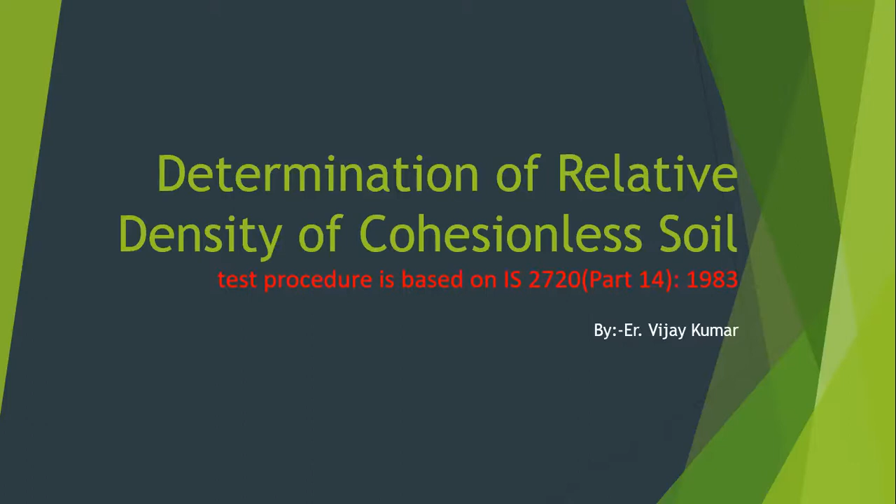Today we are going to do the determination of relative density of cohesionless soil as per Indian Standard Code 2720 Part 14, 1983. So what do we mean by relative density?

Relative density is defined as the ratio of the difference of void ratios of cohesionless soil in its loose state and natural state, which is Emax minus E. Emax is the value of void ratio when it is in loose state, and E is the natural void ratio, when soil is in natural state.

To the difference between the void ratio in its loose state and the denser state. Emax again means the void ratio when the soil is in looser state, E minimum when the soil is in denser state. Relative density determines the compactness of the cohesionless soil, and cohesionless soils are gravels and sand. It's represented by ID, which is equal to Emax minus E.

Emax is the void ratio when soil is in looser state, minus E, the void ratio when soil is in natural state, divided by Emax minus E minimum. Emax again the void ratio when soil is in looser state, minus the void ratio when soil is in denser state.

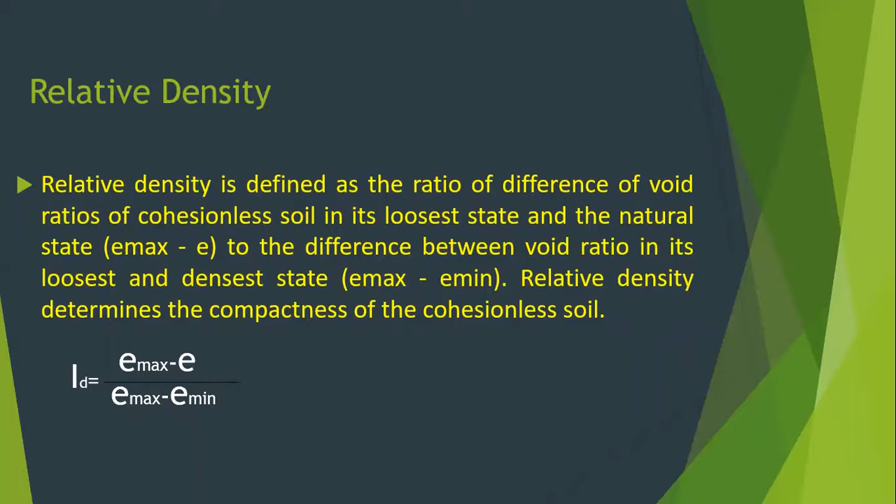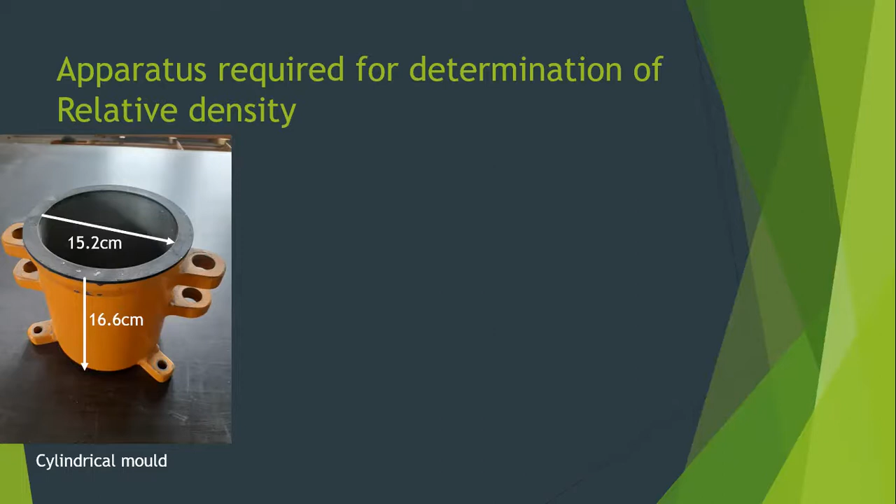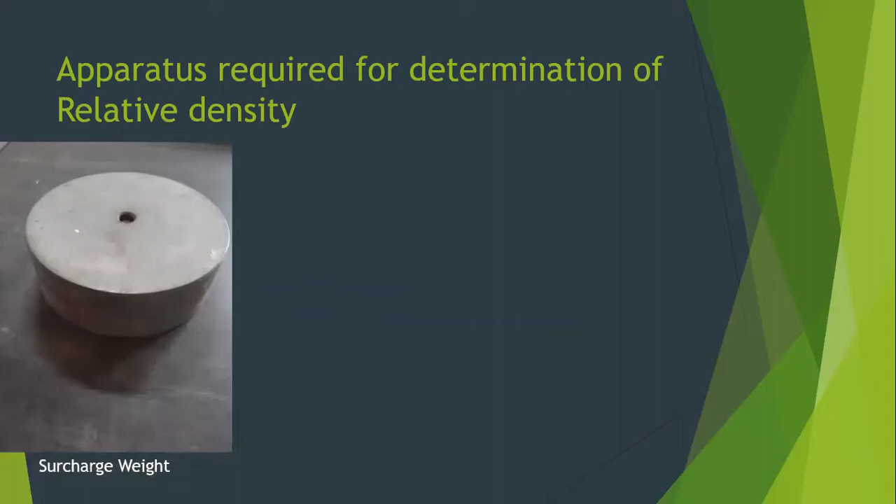So there are some apparatus required to perform this experiment. These are cylindrical mold, its internal diameter is 15.2 centimeter and its height or depth is 16.6 centimeter. Also required: dial gauge with the stand, circular plate, surcharge weight, soil sample or cohesionless sandy soil, and vibrating table.

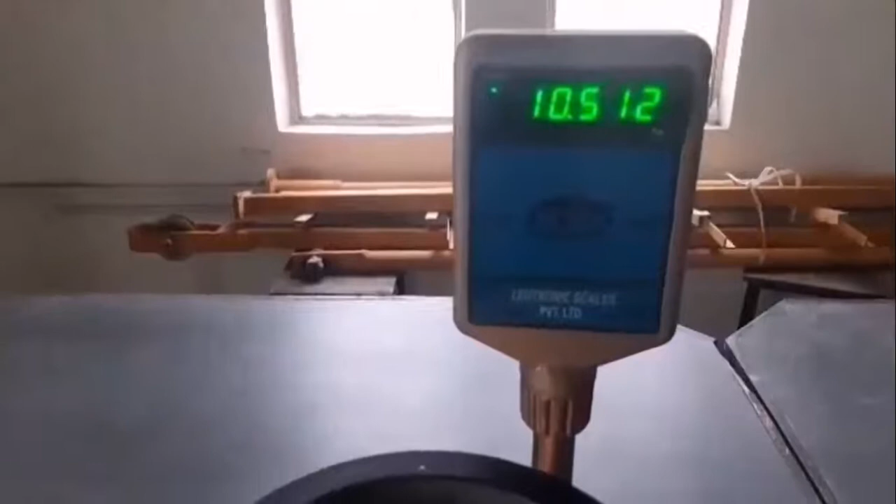Let's see how to perform this experiment. First of all, you have to empty weight the cylinder and note it into your observation sheet, which comes out to be 10,512 gram, recorded as W1, the empty weight of mold or cylinder.

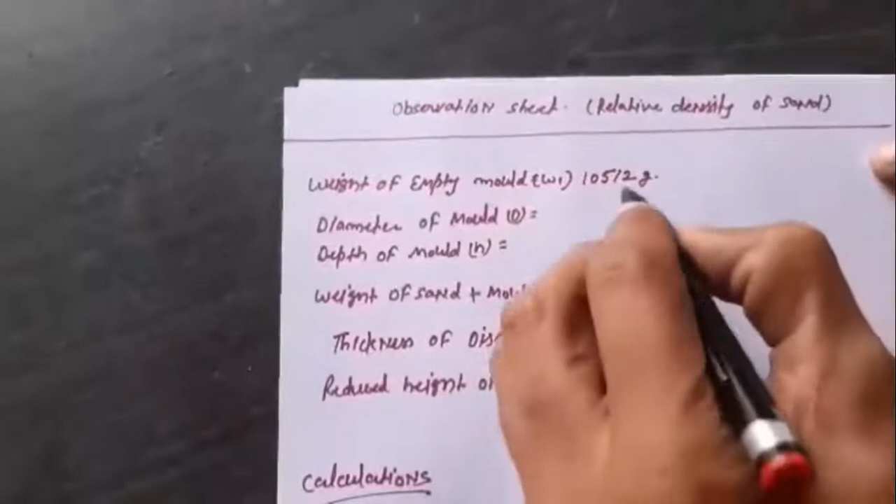Now measure the diameter and the depth. Specifically you should use a vernier scale, but for simplification here I am using the normal scale. Measure the depth and the diameter of the mold and note it down into the observation sheet: diameter comes out to be 15.2 centimeter and depth is 16.6 centimeter.

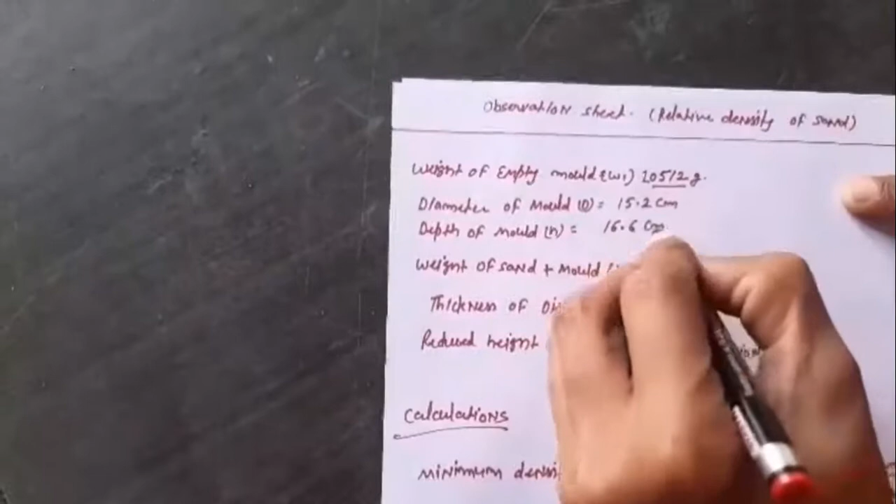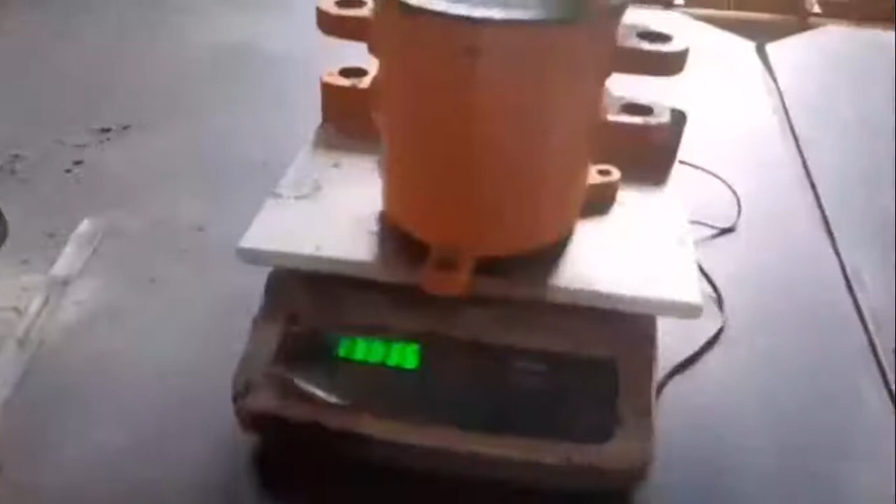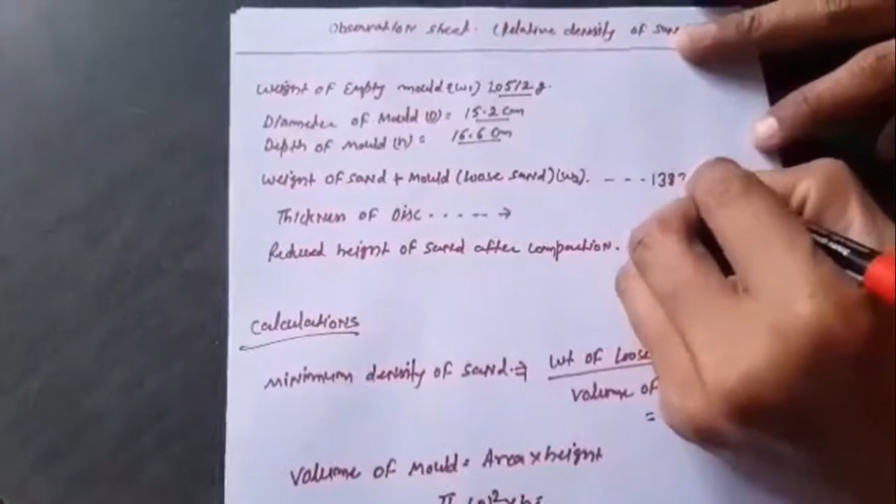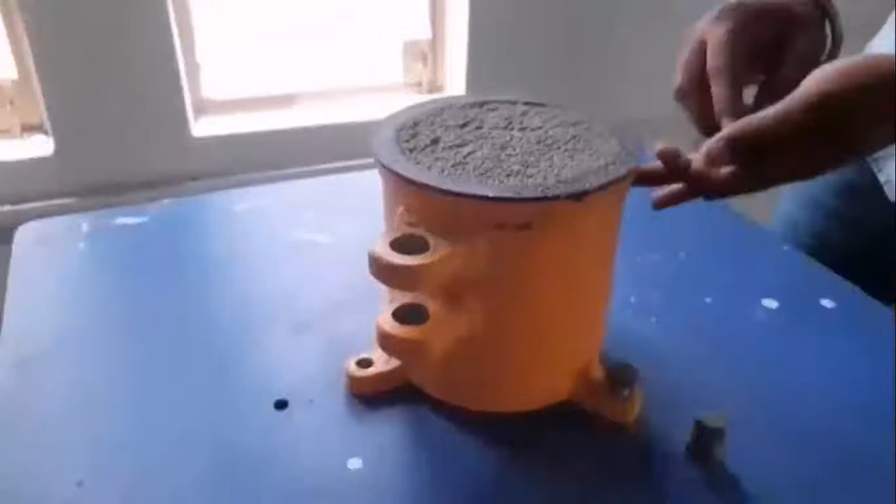Now bring that mold and place it over the vibrating table and tighten the mold using the screws. Make sure it should be tight enough, so that while vibrating it should not move.

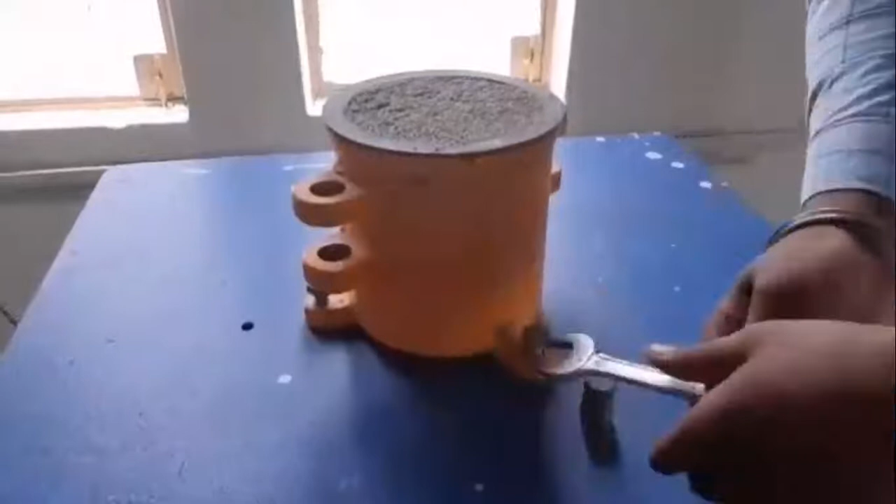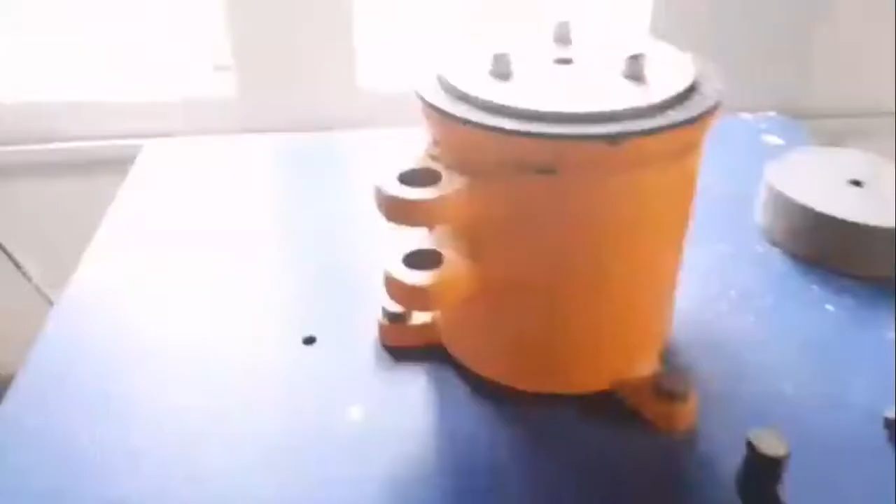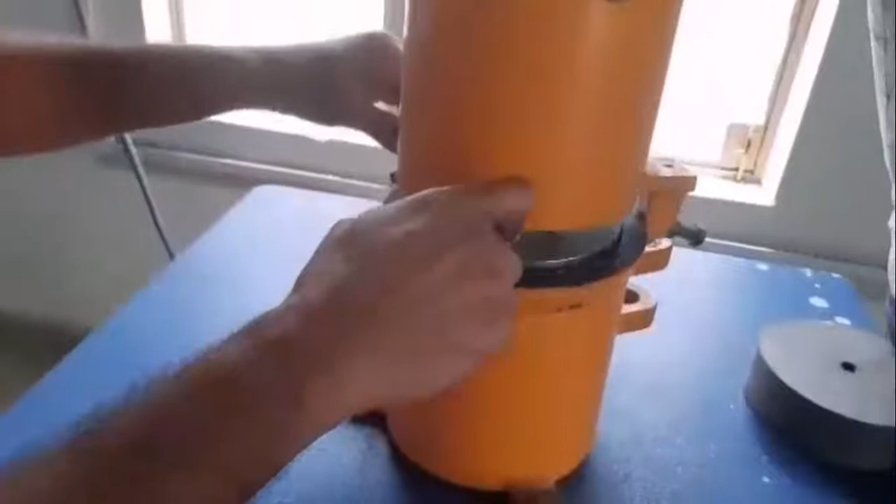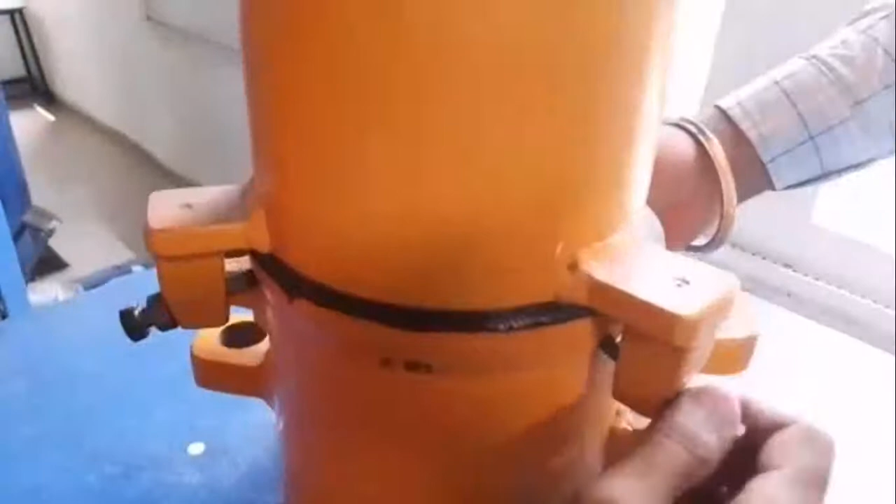Now place the plate over the sample, bring the collar and place it over the cylindrical sample in which we put the soil, placed centrically, and tighten its screws using the tightening screw. Check all the screws should be tight enough.

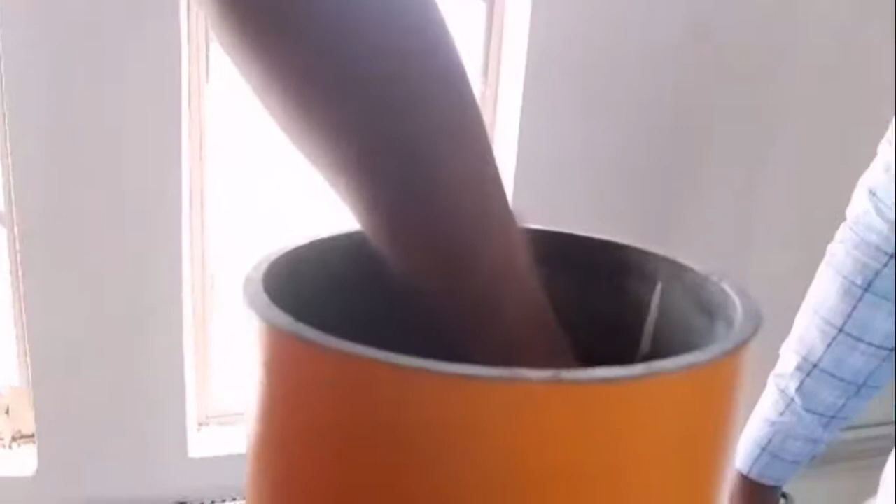Now place the surcharge weight over the plate through the collar. Turn on the vibrating machine, continue vibrating for 8 to 10 minutes, and stop vibrating after that. Take out the surcharge weight and remove the collar by loosening the screw.

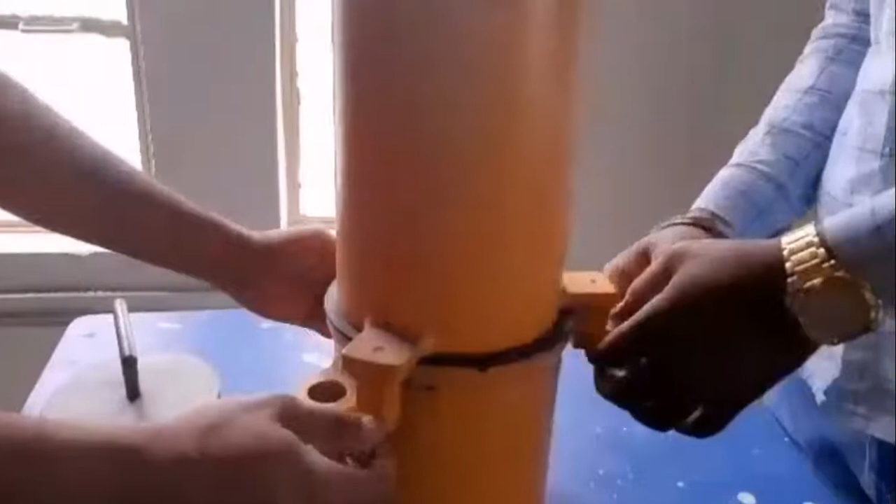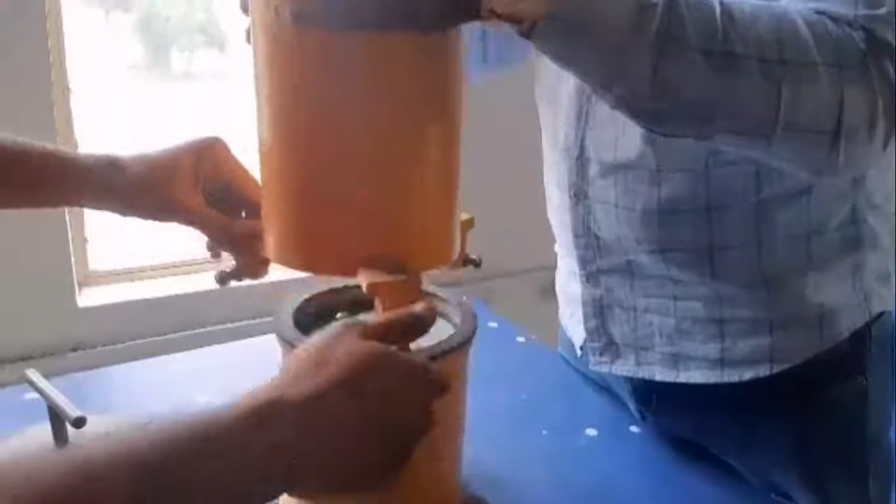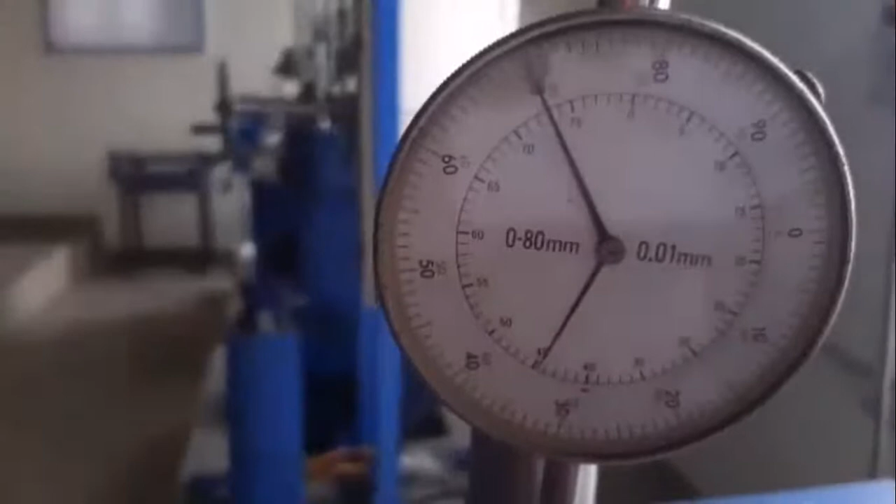As you can see, soil compaction has already taken place due to the vibration. This is the dial gauge that we inserted; initially record the reading, or you can make it zero, which reading is approximately equal to 44.70 mm, with the smaller needle and the larger needle placed like this.

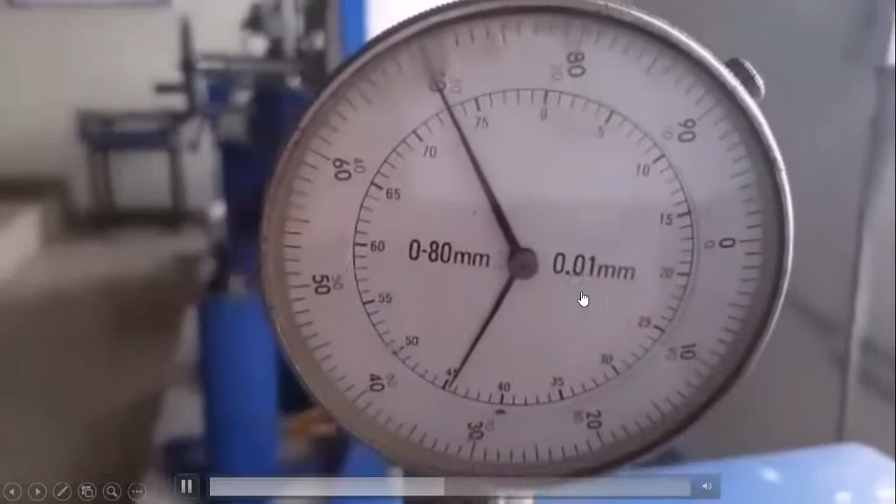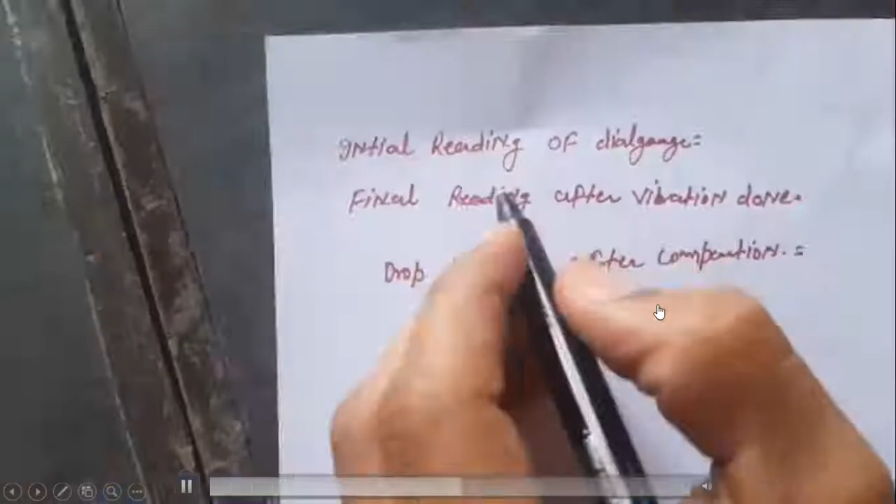So larger needle complete one circle means it's equal to 1 mm. Its least count is 0.01 mm, and smaller needle gives one revolution equal to one digit movement. Now drop the needle to the bottom over the plate and record the reading again, which is approximately equal to 22.91.

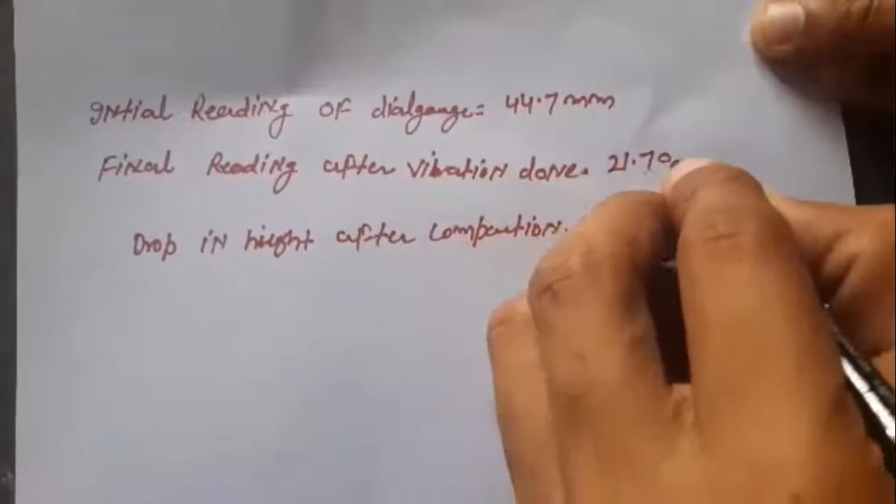Initial reading over the top of the mold. After vibration, that reading is noted, which is 21.79 mm, and drop height after compaction, which is the difference of initial and final reading, comes out to be 22.91 mm.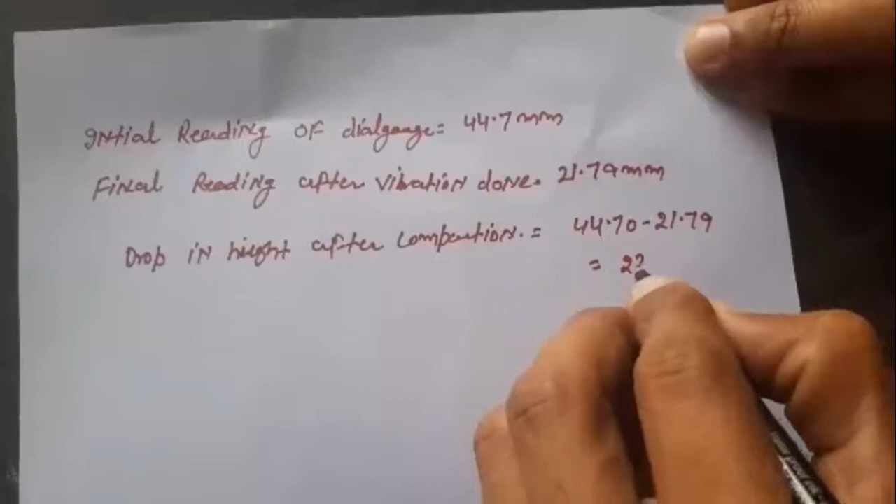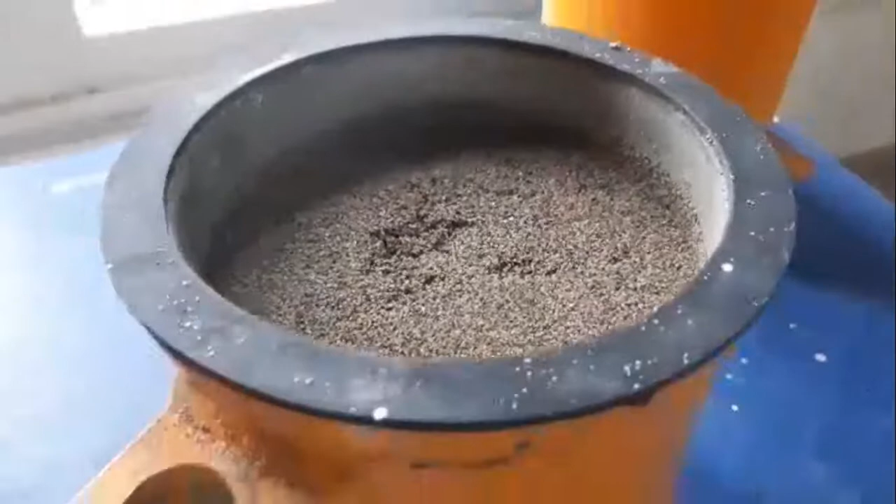Now take out the plate also, which is also included into thickness, and measure its thickness, so that we also add it, because it's also affecting the drop height basically. So measure its thickness and note it down into the observation sheet, which is the thickness of plate.

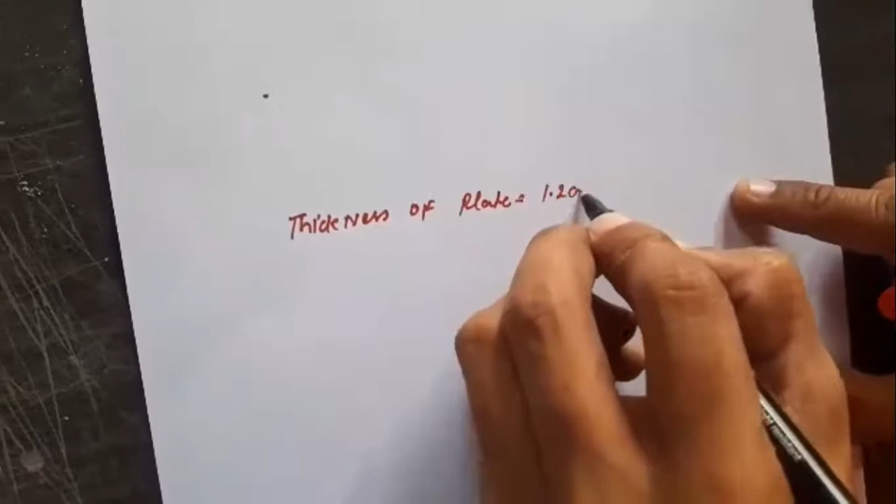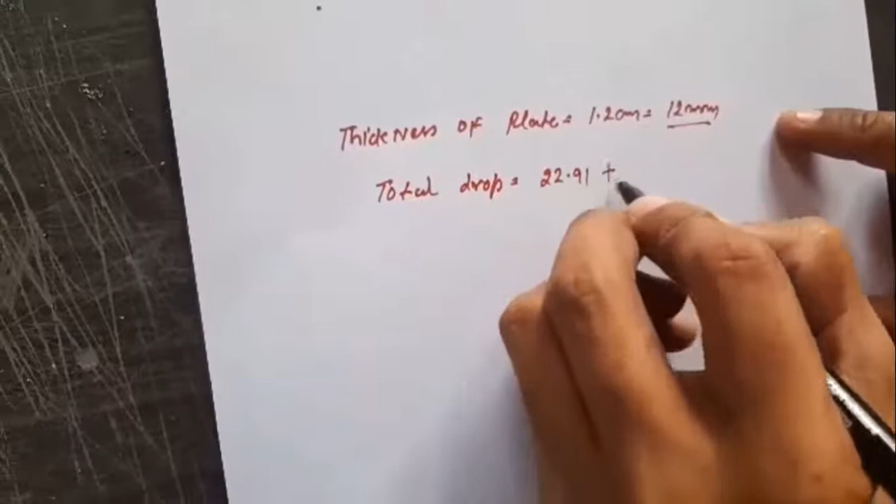That is 1.2 centimeter, nothing but 12 mm. Total drop is the dial gauge reading plus the thickness of plate, which was 22.91 plus 12 mm, comes out to be 34.91 mm. Now bring all the values into the observation sheet.

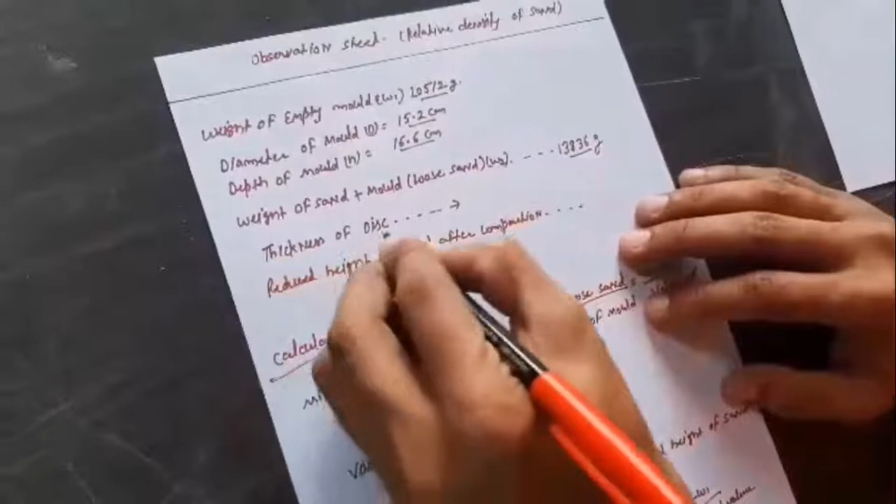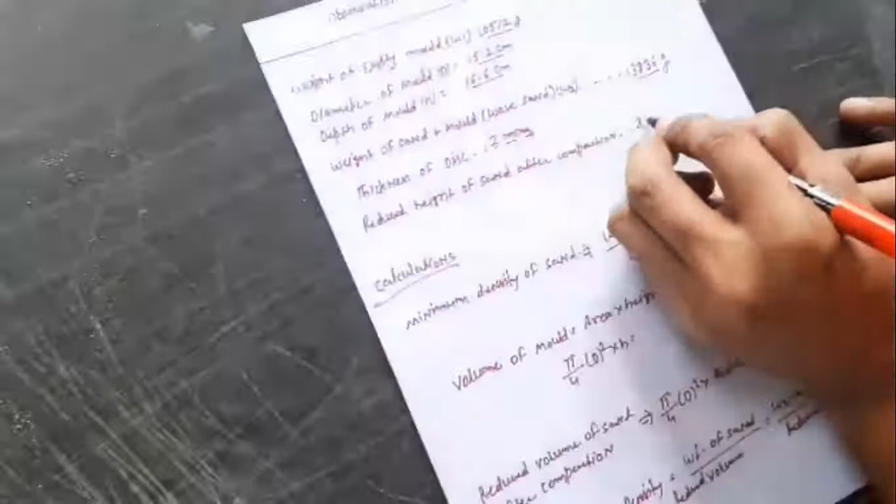There we need to calculate all the values. So put the value of thickness of disc or plate, that is 12 mm. Reduce the height of sand after compaction, that is the total height you have to use. This was 34.91 mm.

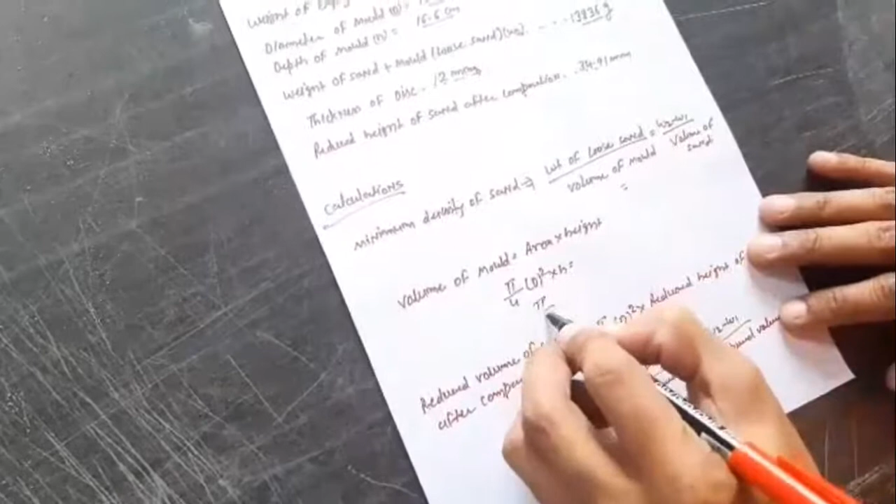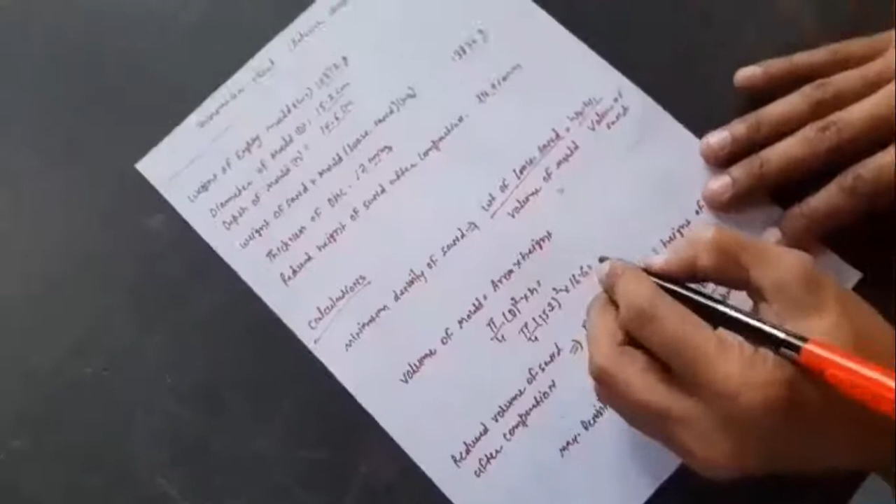Now calculate some values, which is volume we required. Minimum density of sand is nothing but weight of loose sand by the volume of mold. That's why we have to calculate volume first, which is area into height, and area is pi by 4 d square. Put the value of dia and the height, you will get the volume of the mold.

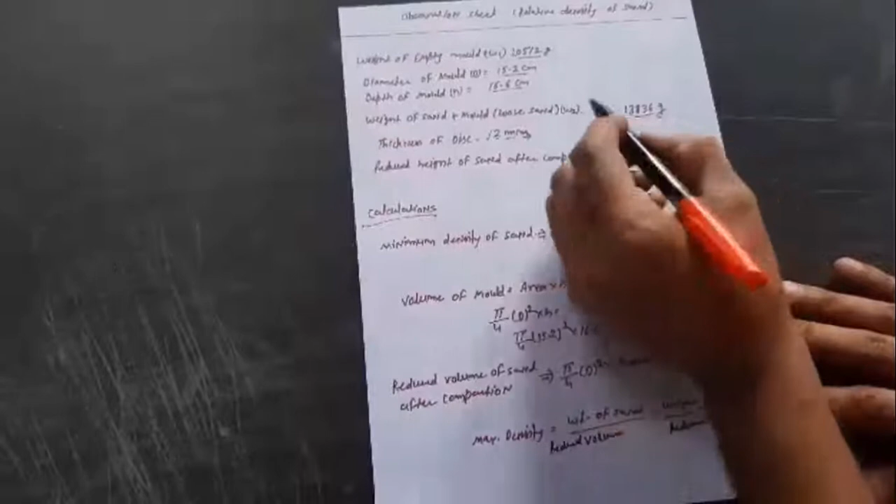Initially, mold and sample height is the same, that's why I'm just considering the value of mold here. So weight of loose sand, basically W2 minus W1 divided by the volume, you will get the minimum density when soil is in looser state.

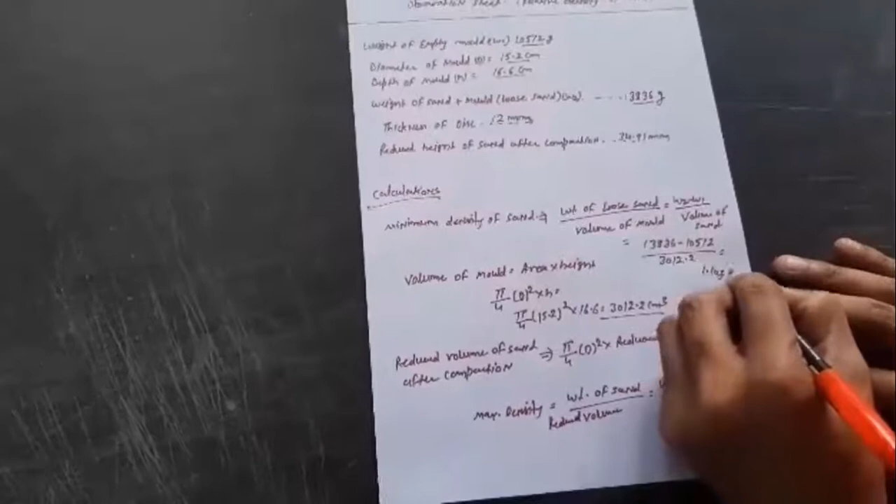Now calculate the new volume or reduced volume. After the compaction, height of sample is reduced, volume of mold remains same. Now we need to consider the volume of that reduced sand.

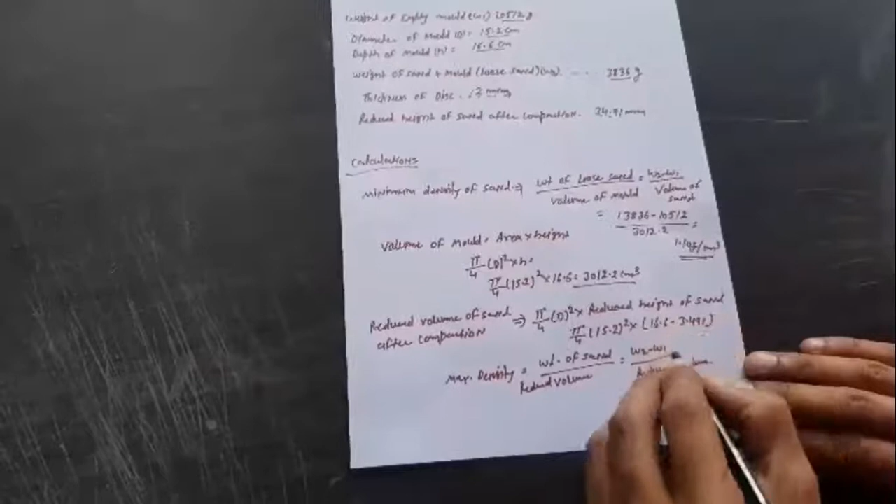So dia remains same, but height is now reduced, which was initially the height of that sample or mold, 16.6 centimeter minus 3.491 centimeter. That reduced height you have to subtract, and after that calculate the volume. This value of volume is coming out.

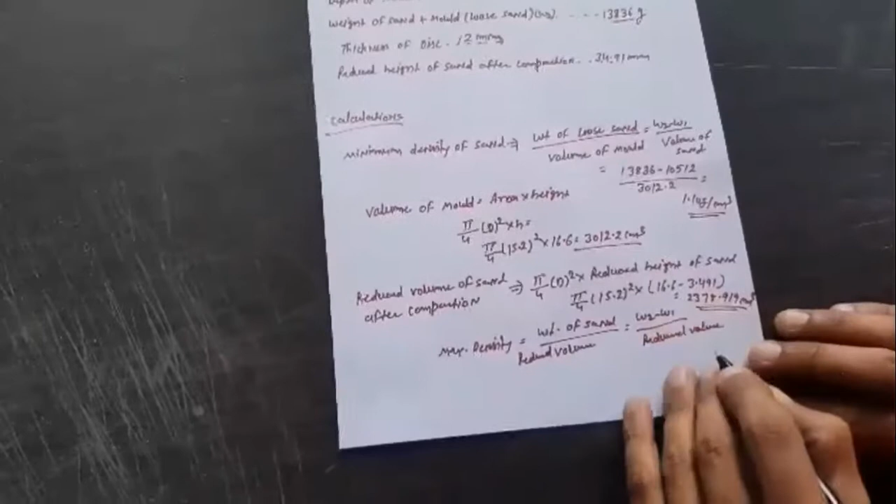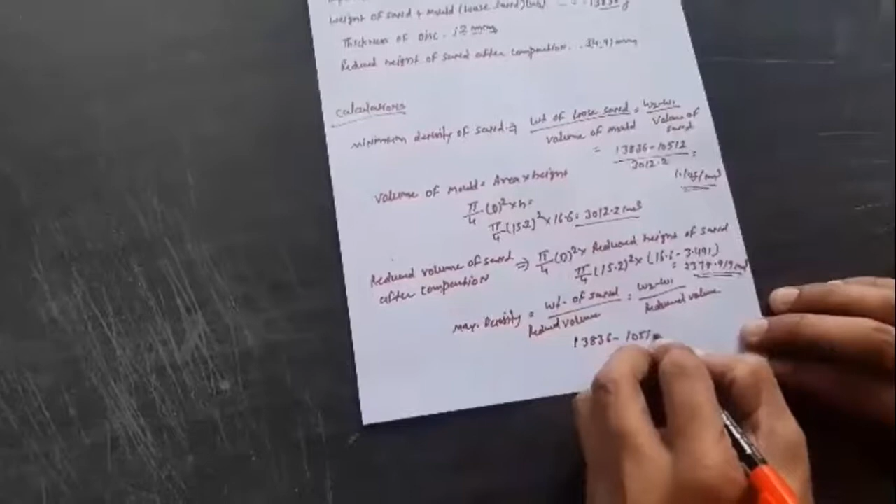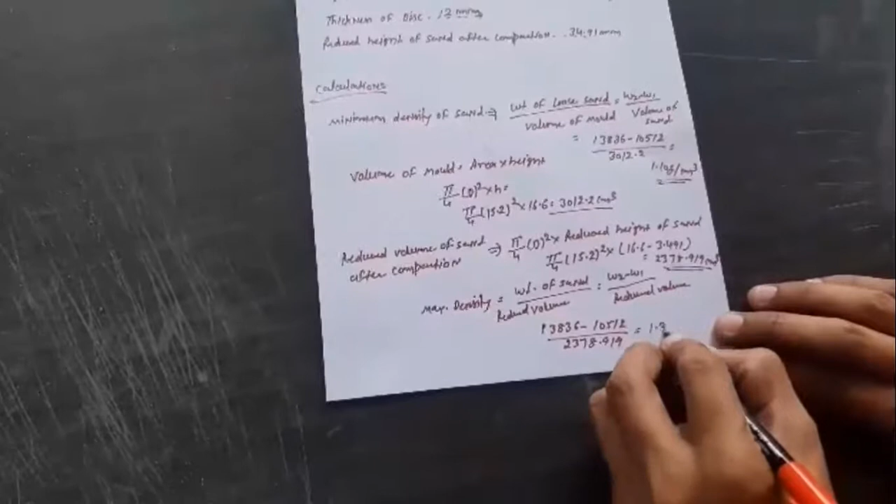Now maximum density is nothing but weight of sand. The weight remains same, volume is reduced; divide by that reduced volume, you will get the maximum density of that sample. It's coming out to be 1.39 gram per centimeter cube.

So initially, minimum density when soil is in looser state means void was maximum at that time, and after the compaction, void is reduced, density is increased. You can say here that the relation between the void ratio and density is inversely proportional. As the density increases, volume of voids in the soil sample will reduce. So that's how you can calculate the values.

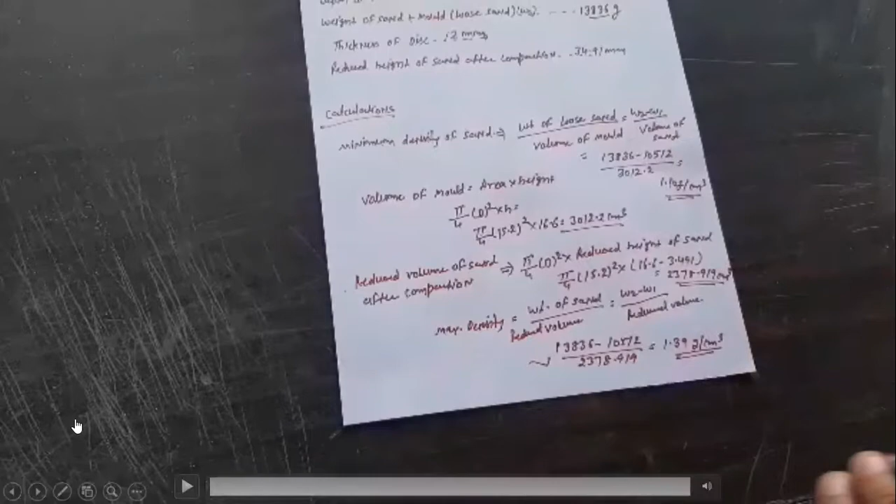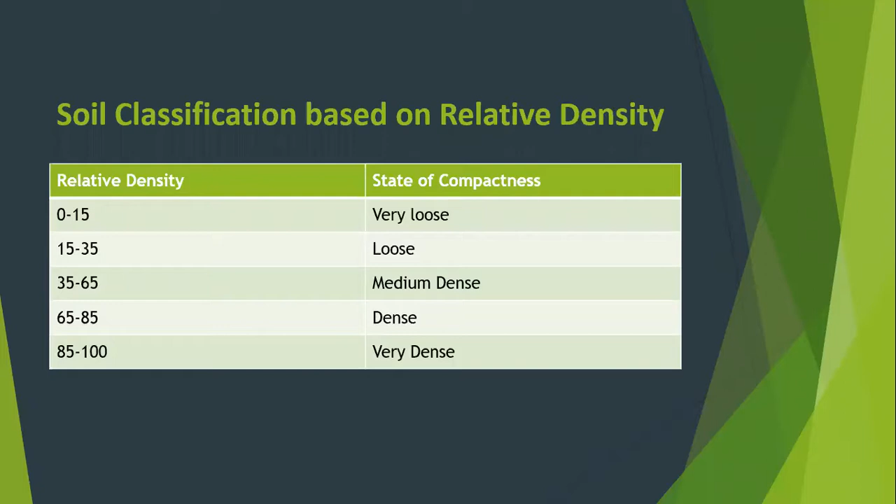So this is all about the relative density, how to check what is relative density, each and every aspect we already seen. So thank you guys, take care.